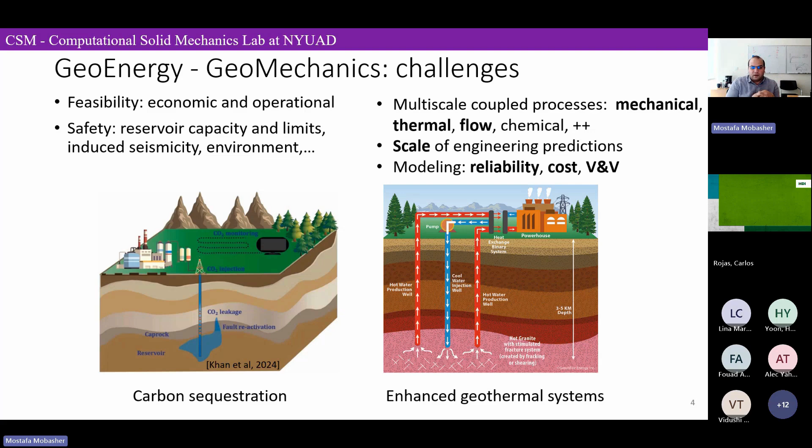And at the end of the day, we want reliable models. We want them to be done within a reasonable cost in terms of the computational cost and even money-wise, the physical cost. And we need validated and verified models as well. Which brings me to this: how are we going to approach these very, very expensive simulations?

Traditionally, we have been looking at finite elements and other traditional computational models. They are rigorous. They've been developed over the years. We trust them, but we know that there is a bottleneck. While they are rigorous and reliable, the bottleneck can be the simulation time, which can be hours, days, or even more, even prohibitive. There are high memory requirements, and anyone who works in that field understands how models can suddenly go out of proportion once you start adding additional physics or trying to model multi-scale response.

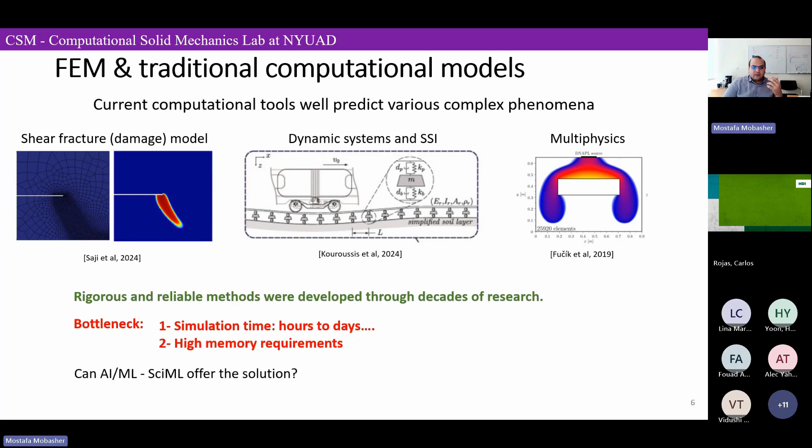Now, over the last five, six or more years, we have been hearing about artificial intelligence, machine learning, and particularly scientific machine learning, physics-informed neural networks, and all of these. The question is, can they offer a solution? There have been many developments and many trials in the community. There are data-driven approaches. They are known to be expensive with poor extrapolation. There are the physics-informed or physics-based approaches. They do work for smaller examples. They become much harder once you go for more complex geometries, phenomena, and so on.

And training them is a well-recognized and well-documented challenge, especially as the phenomena become more localized or have high frequency. They are also facing challenges when it comes to 3D or large-scale applications. Most of the applications that we see in the literature are small academic problems that, once we start expanding them, we face a lot of problems. And then comes the nonlinearity, especially when you start to model very complex phenomena like fracture.

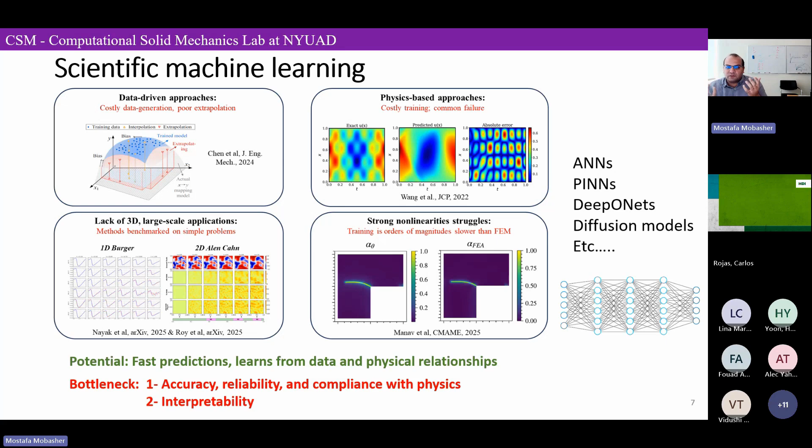Although there are some initial successes, we're still far from saying that scientific machine learning models can work. So while they are fast, they learn from the data and they have a lot of promise, there's still a bottleneck in terms of accuracy, reliability, compliance with physics, interpretability, and explainability. If we're modeling a physical phenomenon, I want a model that I, as a human, can understand and reason about, not just a black box that I should believe without understanding what's going on.

So this is what has motivated us to start working on I-FENN, integrated finite element neural network. Basically, we're trying to get into the sweet green spot here. We're trying to get the best of both worlds, combining them to get something that takes the advantages of both the finite element and the neural network. So on one side, we want the efficiency of the neural networks, or at least some of that.

And then we also want to maintain the rigor and flexibility of the finite element to be able to extend this with the confidence that I'm having an accurate and mathematically and physically compliant model. So the idea is to go to multi-physics coupled problems and split the solution into two parts. One equation that's going to be solved by the finite element, and another one or other ones which can be solved using the neural networks to give us a very fast response. And the final objective is to get faster computations with a similar robustness to what we have in nonlinear finite element approaches.

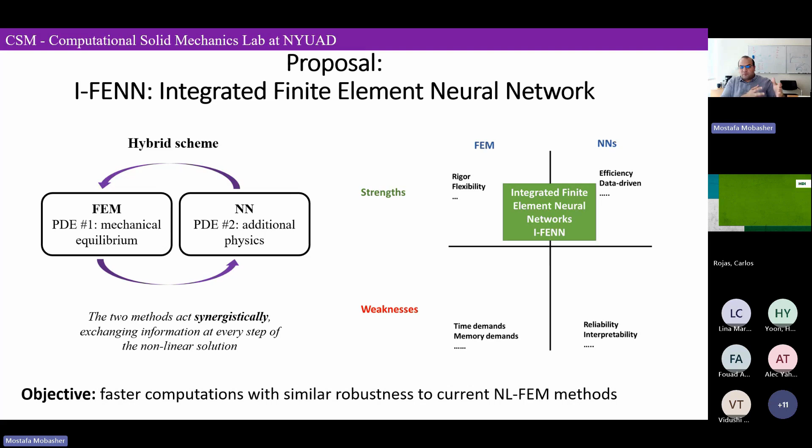I'm going to start with showing how the idea developed. These are two applications that we worked extensively on. One is non-local damage, and the other one is thermoelasticity. In both of these cases, we are solving a coupled system. One equation is the mechanical equilibrium, the balance of momentum. And then in the non-local damage, this is the diffusion equation. And then in the thermoelasticity, this is the heat balance, the energy balance equations.

When we discretize either of these scenarios, we end up with a mixed finite element setup. We start losing the symmetry of the tangent operator. We start looking for more variables that we add into the solution vector, and we know that adding more and more of that will make things more complex.

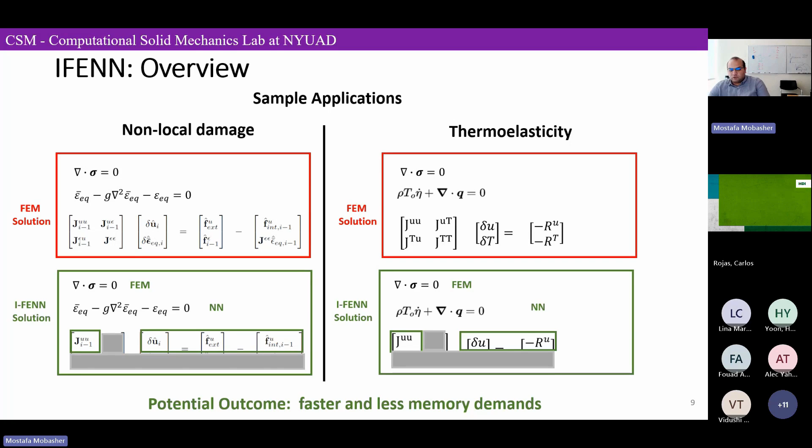Okay, the idea of I-FENN is: let me take the first equation and still solve it using the typical finite element, but the second equation, instead of doing a staggered finite element scheme, I'll just take it and predict the solution of it using a pre-trained neural network. And that way I can embed the solution of this equation into the first equation as a material variable. And we are hoping that the outcome will be a faster and less memory demanding solution.

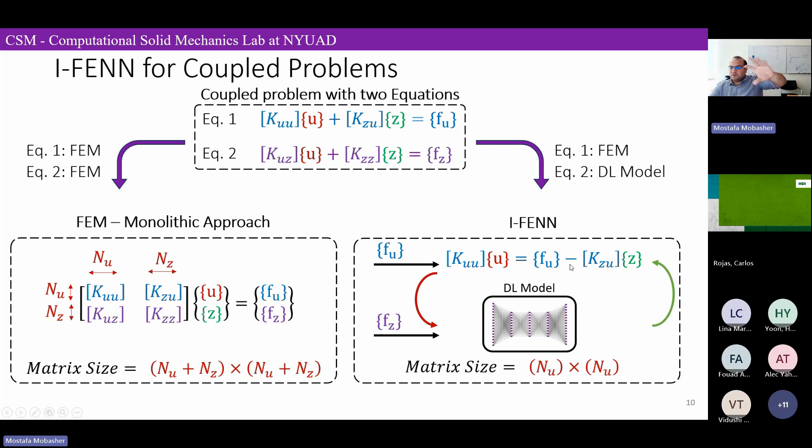And this is kind of another illustration. So if you're doing a finite element monolithic approach, then you're solving this system of equations. So you have your variable u, say that's the displacement, and then a coupled variable z, which can be temperature, non-local damage, fluid pressure, and so on. And then you solve the whole system. With I-FENN, you are solving for the u using the finite element, and then solving for the other variable z using a pre-trained neural network.

We've been working on this method for the past 4 or 5 years right now. We started from the very basic setup of having a single PINN, physics-informed neural network, to predict a single snapshot in time. And then we gradually started growing that in the direction of fracture modeling and multi-physics modeling. And with each new paper or product that we push into the literature, we are trying to add more and more generalization.

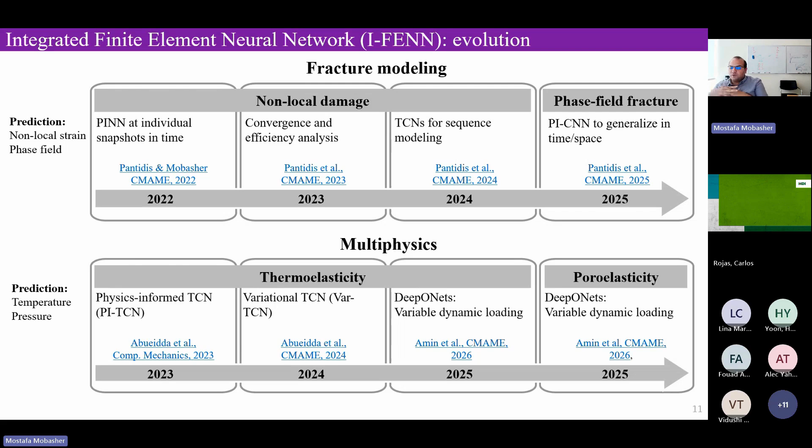So we went all the way from a single PINN at a single snapshot in time to being able to generalize in time and space for phase field fracture. And we're also including variable dynamic loading for poroelasticity and thermoelasticity. And today I'm going to walk you through some parts of that, the most important highlights along that journey, the ones that led to the most important milestone contributions.

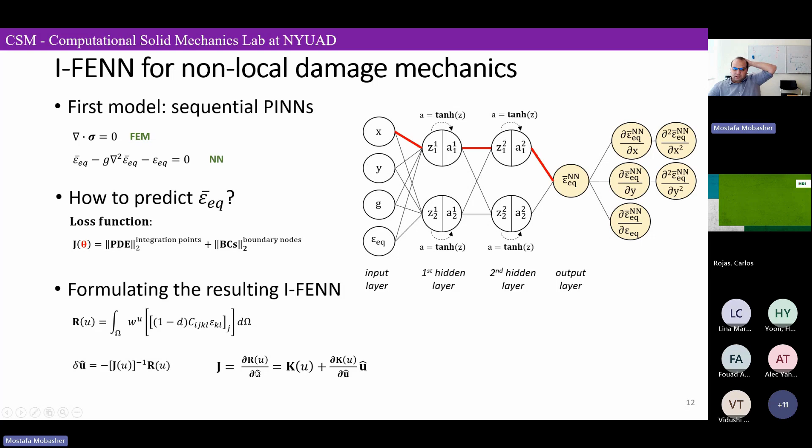And then here, I'm trying to use the Gateaux derivative to get the Jacobian. And you see here that in the Jacobian, I have the K, the elastic stiffness, plus the derivative of that with respect to u multiplied by another u. And then when we try to expand it, you see that K itself is a function of damage, and damage is a function of the non-local strain. And then in order to get that derivative partial K by partial u, I need to take the derivative of damage with respect to u.

But then damage is a function of the non-local strain, and the non-local strain is calculated from the network. So how am I going to calculate that derivative? Then we start doing some pretty simple math with the chain rule, and we realize that I need to take the derivative of the network output with respect to its input. So here, in this term, I have the derivative of the non-local equivalent strain with respect to the local equivalent strain, which is basically the derivative of this output with respect to this input.

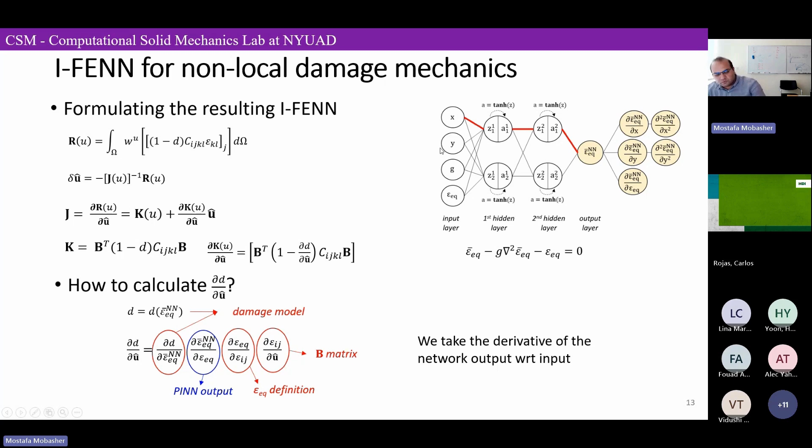And thanks to the autograd functions, thanks to the physics-informed setup, this is something that we can do. So as I said, we are doing this now for a sequential PINN setup. So at each stage in that level of the work, in that paper, at each loading increment, I'm training another new network, another PINN to predict what's happening. And these were the preliminary results.

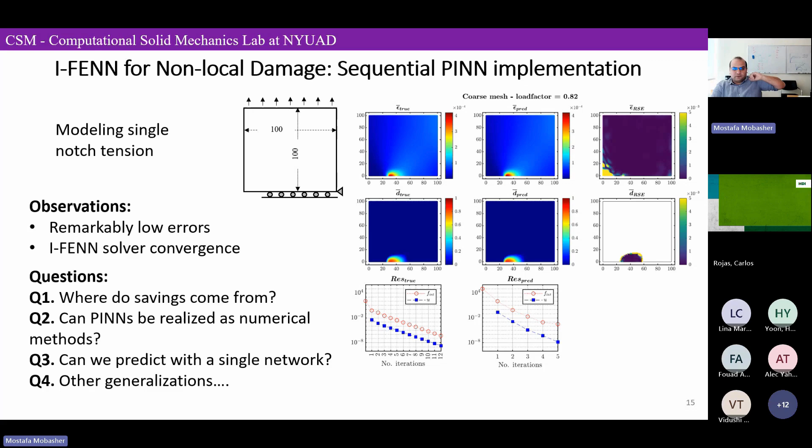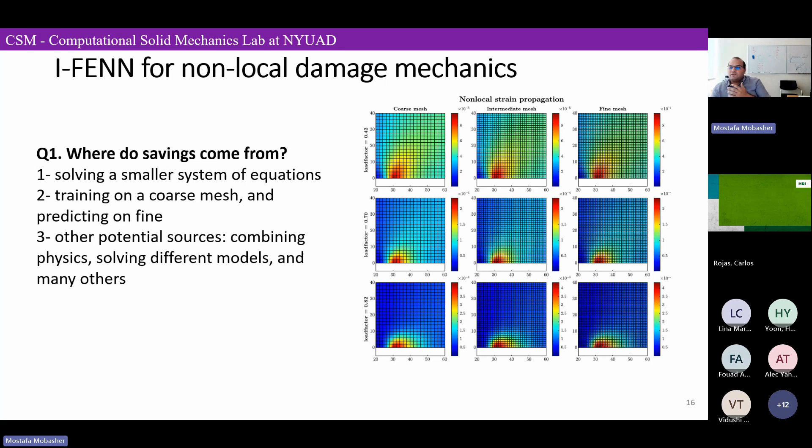Number one, where do the savings come from? As I said earlier, from solving a smaller system of equations. We can also train on a coarser mesh and predict on a finer one. So if you want to do a finer analysis, this is very useful because networks have a very good interpolating capability. And there are other ways also, by combining different physics and different models, that this I-FENN setup can be leveraged to show us more time savings.

The second question is, can PINNs be realized as a numerical method? And for someone whose background is in finite element fracture modeling, this is a very important question for me. Show me the convergence, show me the numerical behavior. It's not just a black box that I turn on and I start getting answers.

So when we looked into the literature and what the applied math people are offering, what we find is the universal approximation theory, which basically tells you that if you take a large enough network, train well enough, and have a big enough data set, you're going to converge. That's the theory. Now, in practice, a lot of that is actually dependent on the optimizer. So we started asking some questions, and we wanted to see things for ourselves. Do they really converge? What are the optimal hyperparameters?

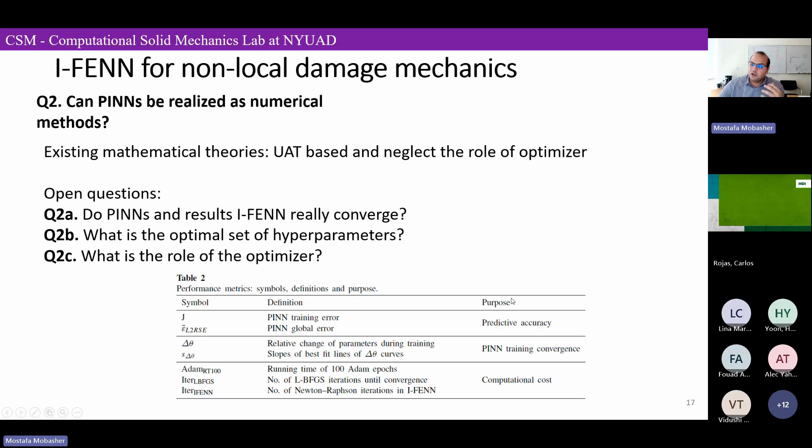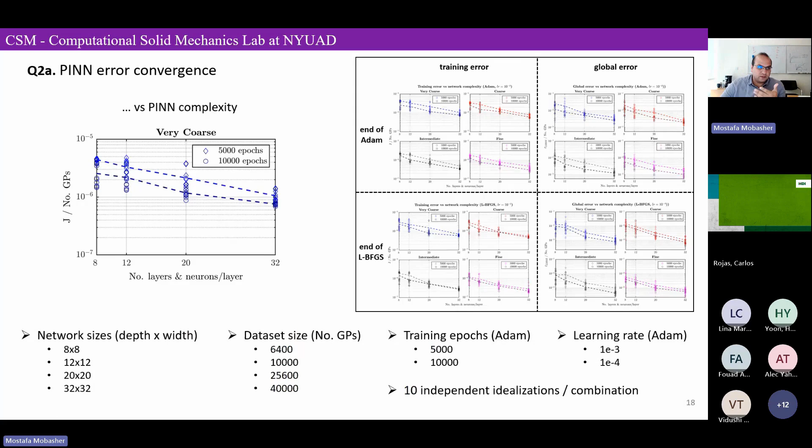In finite elements, we have some ideas about how to choose our element sizes, our time step sizes, and so on. What's the equivalent of that here? So I'm not going to go through all of the details. That's a separate paper on its own, and even that just scratches the surface. But we started doing some empirical analyses, and we established some performance metrics to look at that behavior. And long story short, we saw that our network converges well. As we go to larger networks, the errors decrease. As we train further, the errors also decrease.

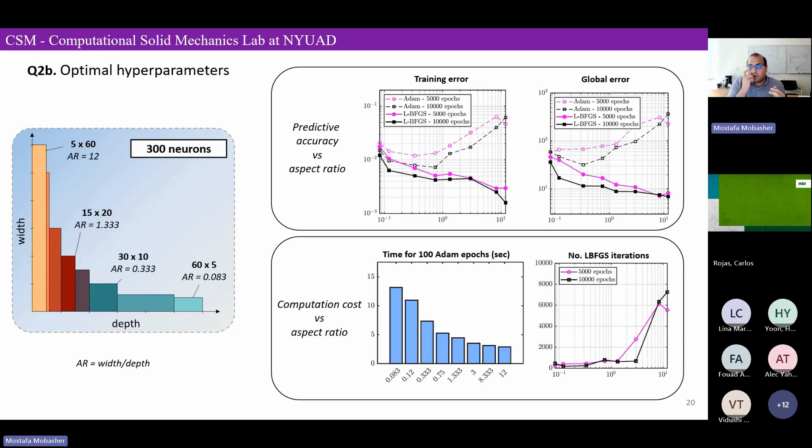We found an interesting thing here, which kind of matches what we see in finite element, that in some cases the best combination in terms of error and computational cost is to use square networks, meaning that the number of layers is equal to the number of neurons per layer. This is an empirical finding for this specific model. We didn't take the time or the effort to look into it further to see if we can formalize this using a mathematical theory, but we confirmed that for the model that we're working on.

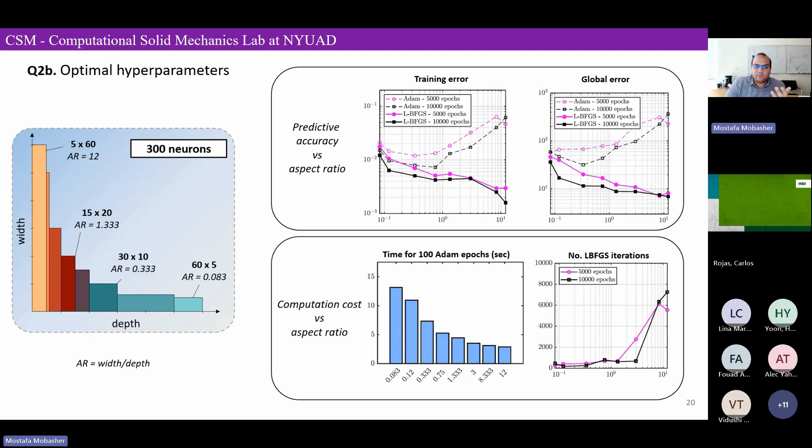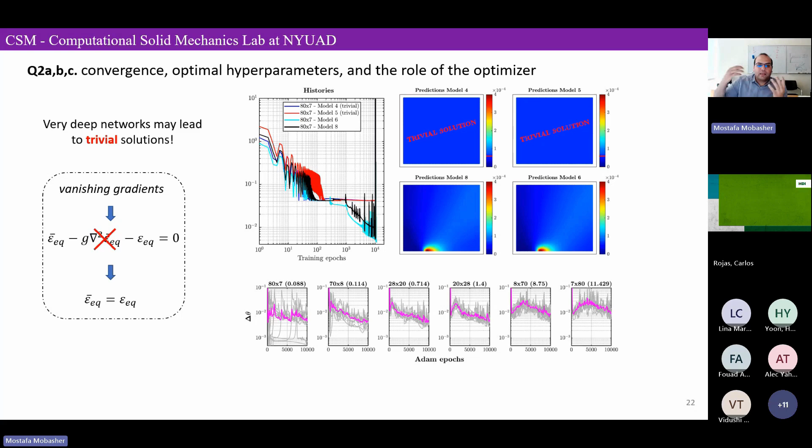But I would really love to see more research into establishing this as a more robust theoretical guideline for people on how to optimize hyperparameters. Right now, many applications just use things like hyperopt or additional packages to optimize the hyperparameters of the network. And then the biggest question for us was the role of the optimizer. So in some cases, when you use specific networks that are too deep,